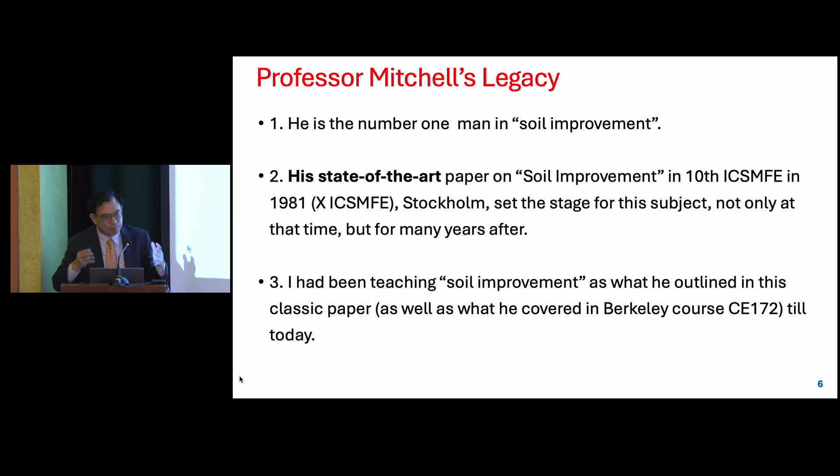He's the number one in ground improvement. I remember his state-of-the-art paper in 1981, Stockholm Conference. To me, it's still state-of-the-art today. Of course, in between there's been a lot of development, but still a lot of basic principles, a lot of key concerns he rightfully pointed out.

Now, by the way, I have that state-of-the-art paper, and to my horror I checked out the table of contents of that conference, 1981. These are all the state-of-the-art papers. Everybody is writing about 20, 30, or maybe 12 pages. Jim's paper is 56 pages. I don't know how many PhD students he asked to help review and summarize things, but he wrote 56 pages, and every word is so profound and so important. Anyway, that is his paper, State-of-the-Art Soil Improvement, 1981.

And not only that, he really spent time, like some of the seniors have said, reading through every reference and making comments, finding something good or wrong about it. He has a list of references, 191 of them, in total 6 pages in double column format. Amazing, right? Now, what I learned from Mitchell, his most important legacy and teaching, is combining three aspects: practical problem solving, and fundamentals of soil behavior.

Of course, we heard about his 4th edition of his book. By the way, his book is a must read for my graduate students, but unfortunately it's so expensive that most of them didn't buy it. Previously there was a cheaper version, but now no more. But anyway, it's definitely one of the very important books that graduate students in Singapore must be aware of.

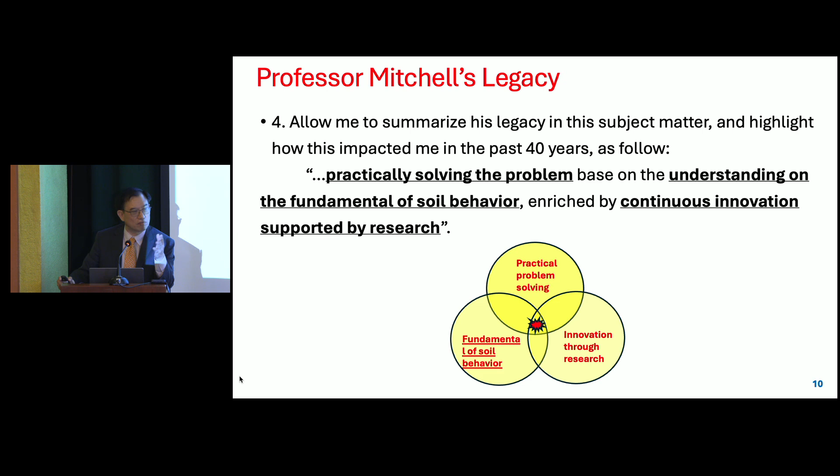And of course, I should also say that Mitchell always stressed innovation. He's quite far-sighted. Someone, the chairman, asked what he thinks Jim will work on now. I think one of the things will be sustainability. I read one of his latest papers - I think a Virginia Tech student, a colleague, may correct me if I'm wrong - one of his latest papers is on carbon footprint for ground improvement. I thought it was very interesting.

All right, anyway, I'm going to share with you the 4 aspects that have affected me, and being his student, I followed his footsteps, which affected my students and the industry in Malaysia and Singapore. Very quickly, I want to highlight 4 aspects which some of you are very familiar with: cement treatment for soft clay, innovative PVD using electro-osmosis - probably Albert has spoken a lot on that - geosynthetic soil improvement using poorly draining soil, which Zornberg may talk more about, and freezing technique in tropical countries.

Let's move very fast, we can skip this one. Well, I know this whole story - telling you jet grouting and deep cement mixing became a norm in Singapore, or of course in Hong Kong as well. When I first returned to Singapore, not many people knew about this technique, but now it's become a norm. Not only that, because we have a lot of underground construction, thick layers of soft clay, and a lot of mega projects like I'm going to show you, such as the airport, that really need ground improvement.

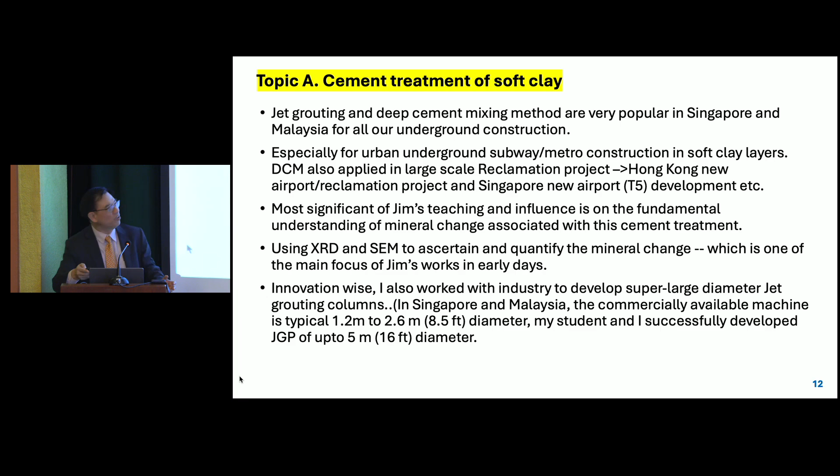And not only that, I should proudly announce that XRD and SEM have become common day knowledge among geotech engineers in Singapore now, thanks to me and other Mitchell students, who try to tell people that if you want to know real soil behavior, especially clay, you must know what Mitchell is holding here - the model of the clay mineral. All right, and these are my standard lecture note materials, telling students about all the different types of clay mineral in a model form and in a schematic diagram form.

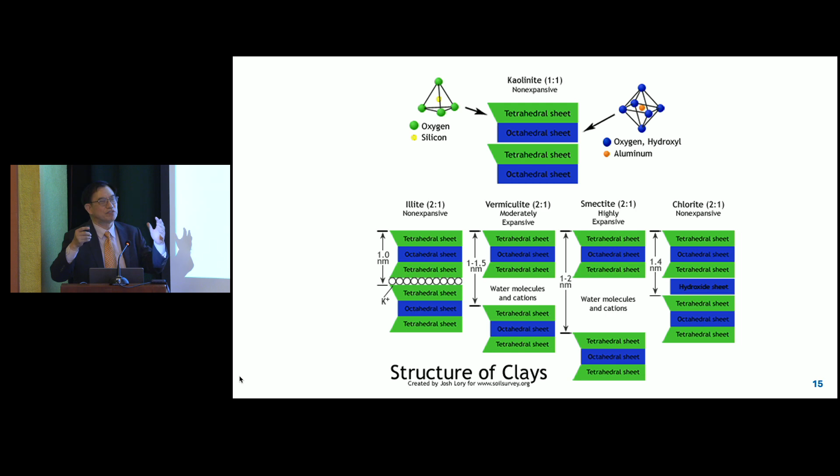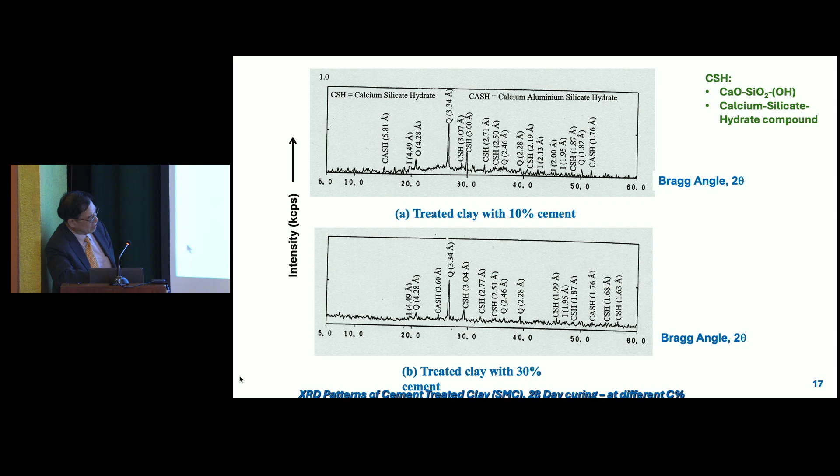A lot of the time we find in Singapore that actually only kaolinite gets transformed. That probably explains why certain parts of Singapore clay are more effectively treated with cement, because there's more percent of kaolinite there. Other parts of Singapore, or parts of Malaysia or Bangkok, have clay that's less kaolinite, more illite. That probably explains it very well.

These are again some standard Berkeley student pictures, nothing new. This is not the best picture, you'll see a better picture from Mitchell, but this is in Singapore.

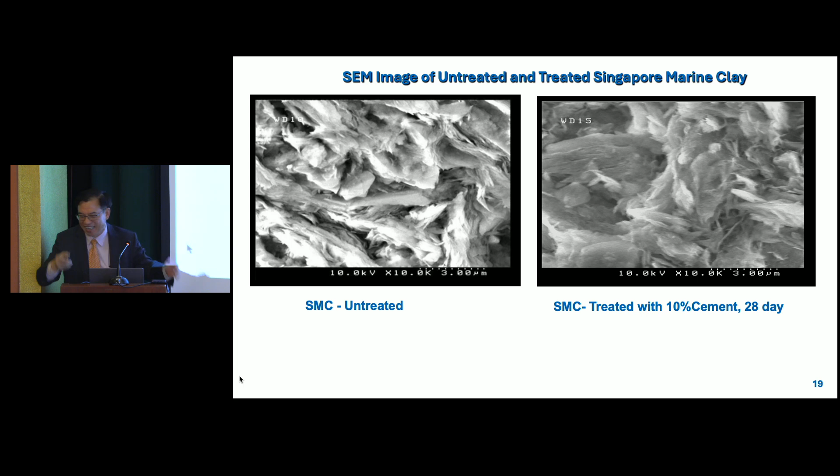These are my pictures. The first thing I did when I went to Singapore was convince my head of department to buy a scanning electron microscope and an X-ray diffraction machine. We use it in a lot of our consulting jobs to explain how clay structure changes by adding all this. We even bought the expensive mercury intrusion porosimetry to determine pore size.

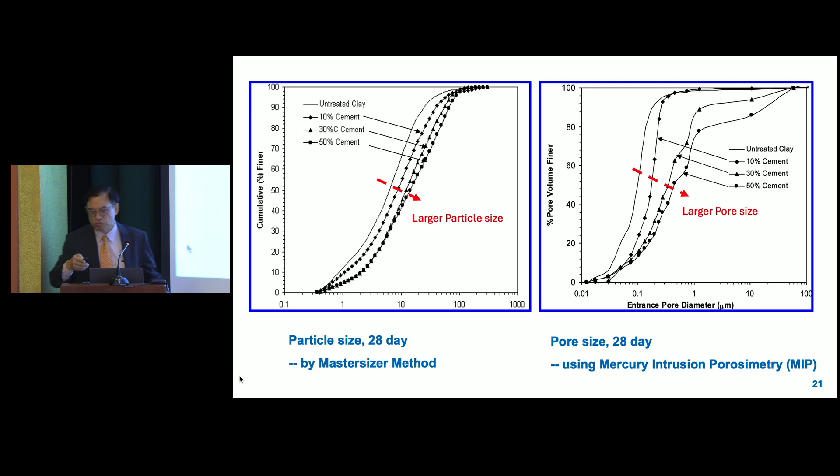We also moved into incineration ash, and you can see with incineration ash, the SEM feature will be quite different when you add SCM with that.

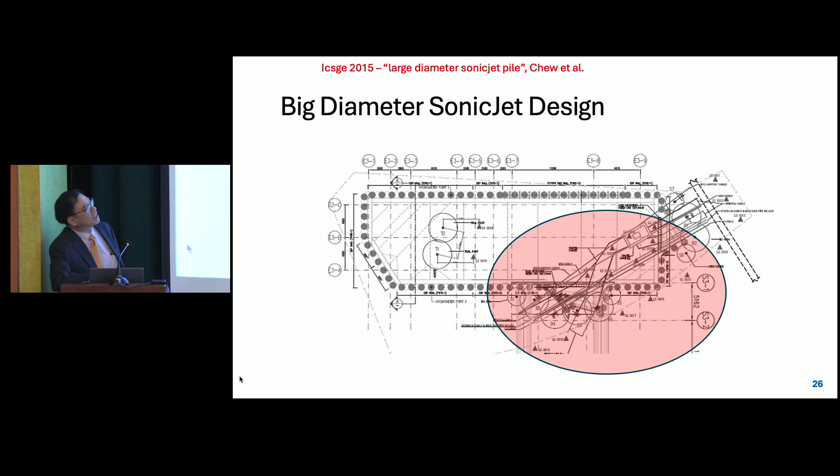Okay, now let's talk about innovation. One of the things I'm proud to announce is that my student and I also got into the mechanism of doing jet grouting, and we developed a bigger diameter jet grout pile.

In the Singapore market, typical piles are up to about 2.6 meters, about 8 feet. But with my involvement and my student's involvement, we managed to change it to 4.3 to 5 meters, about 16 feet.

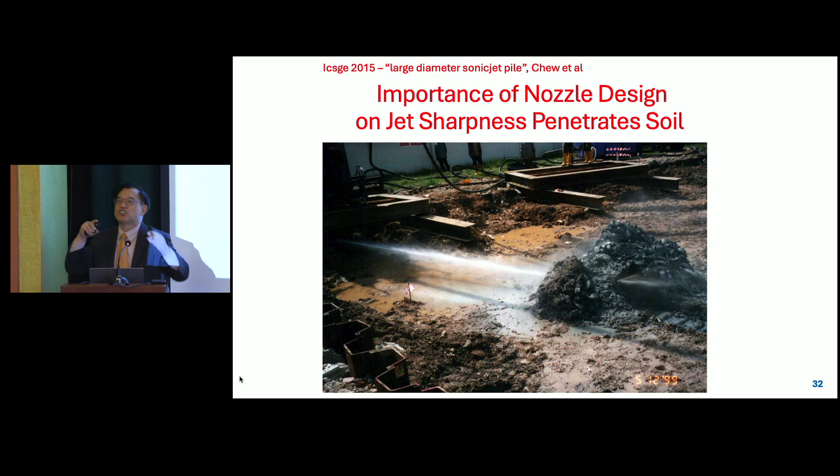So we even invented the testing. You can see this is the conventional jet grouting - the jet energy disperses at a short distance. Whereas the sonic jet that I developed together with my student, the concentrated energy can disperse over a very, very far distance. This is a special paper I can put right in front here.

Okay, let's move on to the second topic - EO. Well, you can skip all this theory; Albert nicely shows all the complicated equations. But in Singapore, following Jim's concept, we look at where it can apply in the field now.

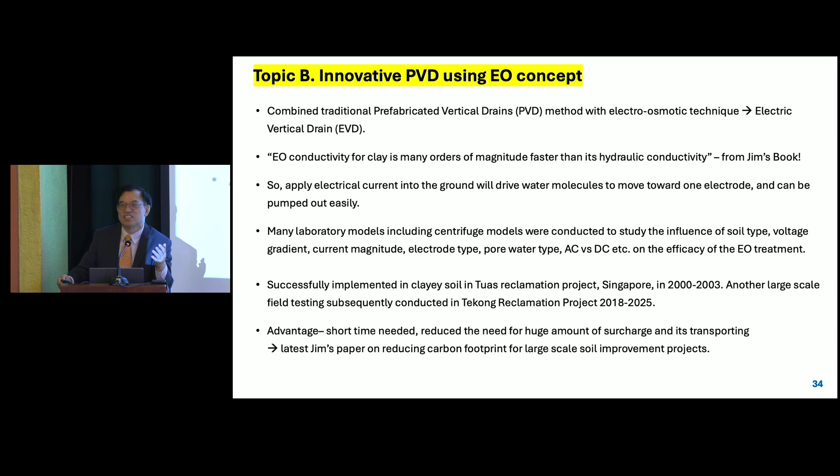So we applied it in the field, and we managed to find one place. But before that, let me show the end result.

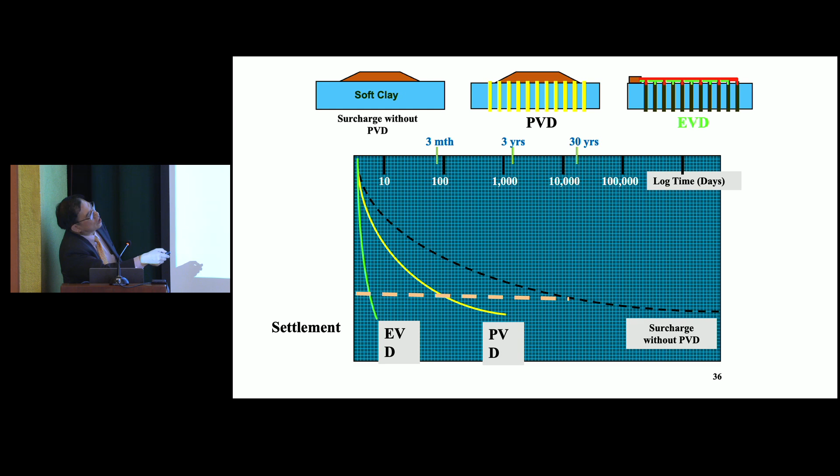So by introducing electric current into the ground, you drive water molecules through electroosmosis, moving them to the cathode, and you can easily pump it out. That effectively achieves consolidation without needing too much surcharge on top, and the time is also fast.

We did a few trials in Singapore on our reclamation project. You can see it just looks like a normal PVD, but if you look carefully, the drain itself has to be connected with wires - these are copper wires of two different colors, one anode, one cathode - and then we run the test.

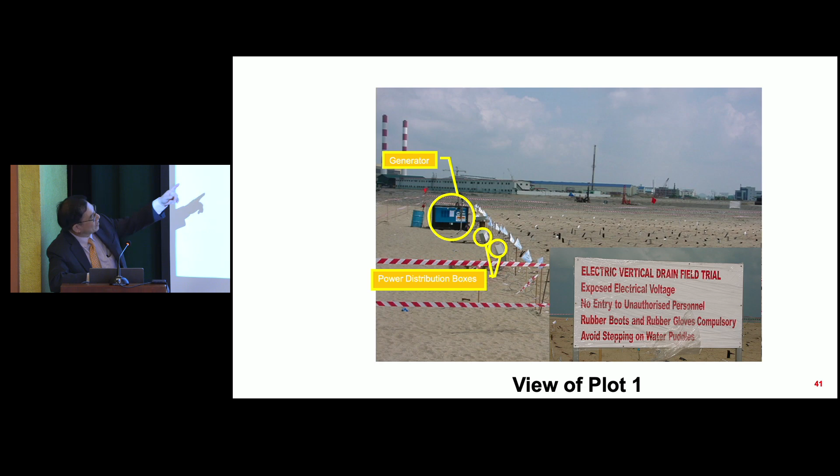To cut the story short, these are my poor PhD students who had to risk their life to measure the potential gradient when the power was supplied. Although we tell them this is at your own risk. Anyway, it was safe. I was there myself too.

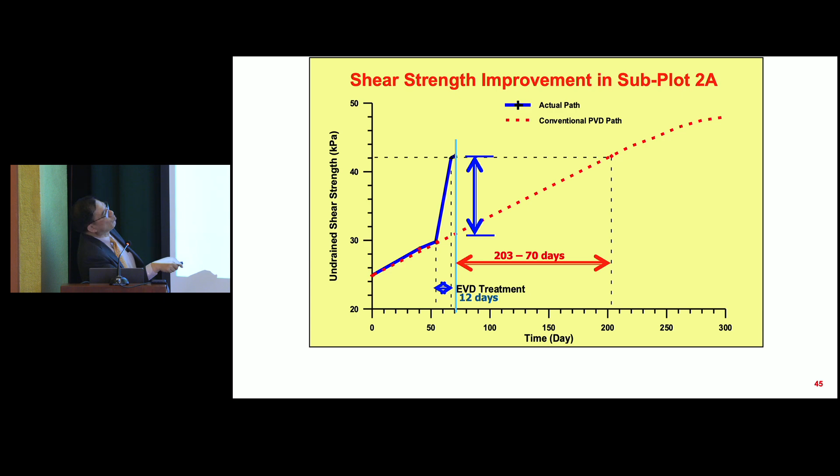Let me summarize with this graph. Instead of settlement, I'm plotting strength gain versus time. This is a conventional PVD calculation, and with the electric vertical drain under EO, you can see it move along the blue line. When you apply it for about 12 to 14 days, you can achieve strength equivalent to about 200 days of normal consolidation time. So with that, you really speed up the consolidation.

Of course, that translates into money savings and so on. But of course, you pay for the higher material cost for the EVD, and you pay for the cost of applying the current. But anyway, that is one step forward.

My next quick topic, which was actually my PhD topic, is on reinforced soil wall. I'm honored to have joined the esteemed team of Adib, Makram Jaber, Gary Schmertmann, and of course Jorge Zornberg. I forget to mention Collin, James Collin, though he was there before I arrived at Berkeley. These were the team of people that started the work on soil reinforcement, and we helped compile the FHWA guide.

At that time, the FHWA guide only allowed sandy soil, which is freely draining, to be used. When we returned to Singapore, I realized that for all the projects we do, we do not have free draining sand, we do not have clean sand. Instead, we have a lot of silty sand, clay silt, sandy silt. We have residual soil, which is a mixture of sand, silt, and clay to a certain extent. So they are not good draining, but can we use them?

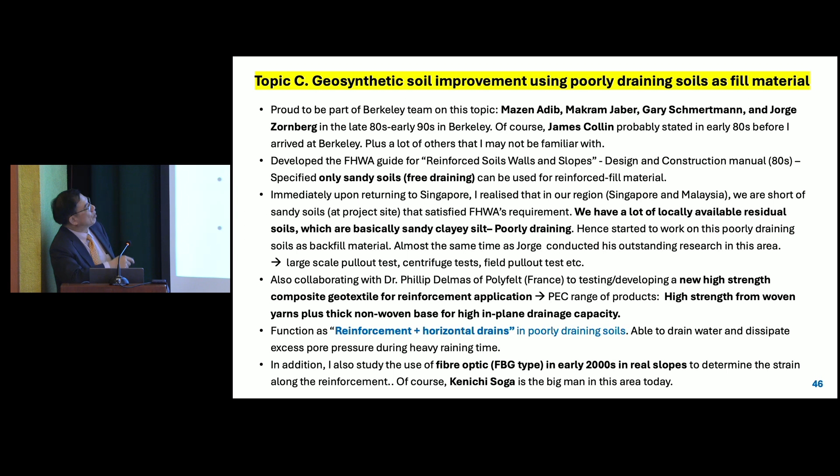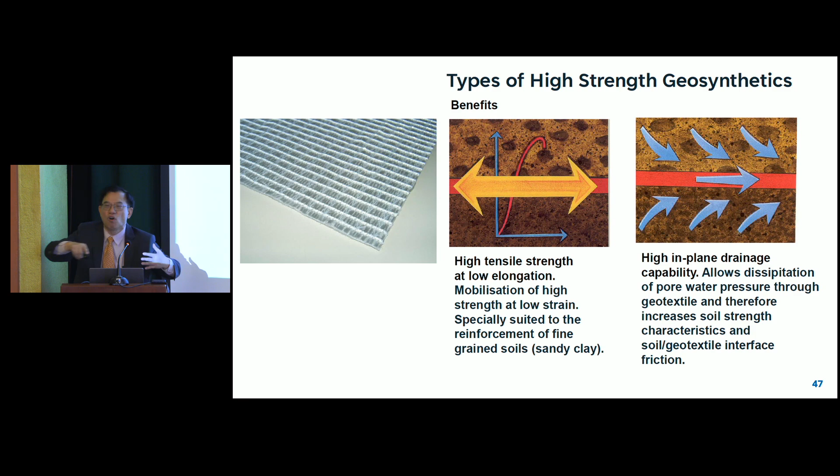One of the important things I did was collaborate with Dr. Phillip Delmas from Polyfelt France, a company subsequently bought over by others, to develop a new type of geotextile product that takes into account not only reinforcement but also in-plane drainage. So in short, you have a high-strength woven yarn that takes care of the reinforcement aspect, but you also have a thick non-woven base which provides in-plane water drainage. With that, water can come in during heavy rain and flow along this non-woven geotextile, serving as a very thin horizontal drain, and it worked well for us.

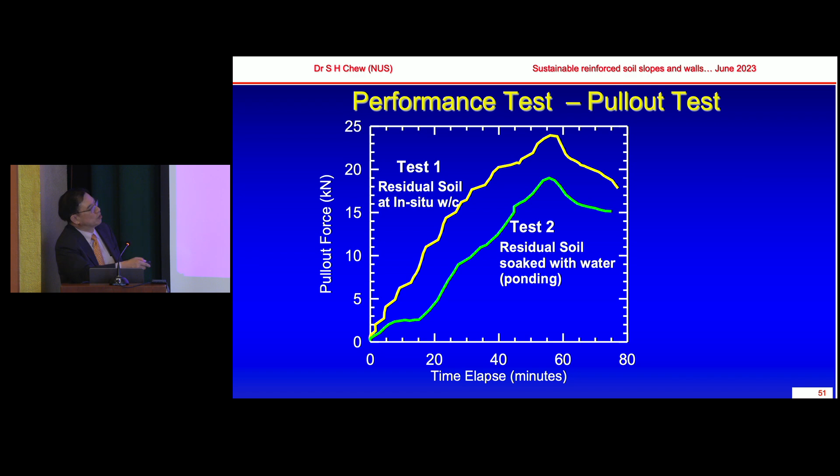Due to the shortage of time, let me just show you a few things. This is the kind of soil that we have - definitely not sand, because we use a sheep foot compactor, which is what Jim taught us in class. This is only for clay soil, and that's how we built all the walls with different facing.

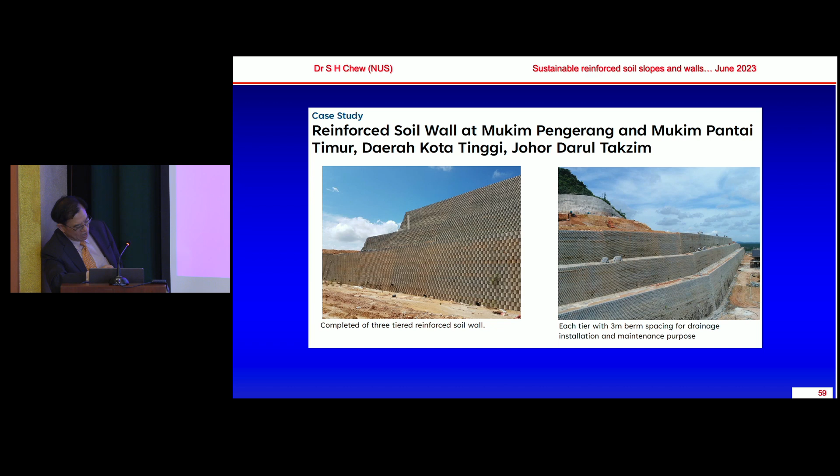I'll just show you how high we built these walls with residual soil, and the movement we monitored upon completion of the project. Total height went up to about 40 meters, with movement still less than 20mm if we stagger it properly, so it's good. Sometimes we like it more green, so the facing we also want it to end up green, like this.

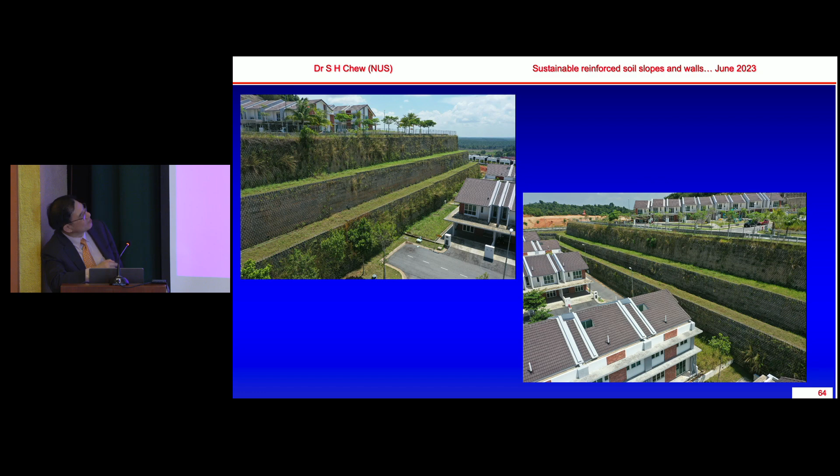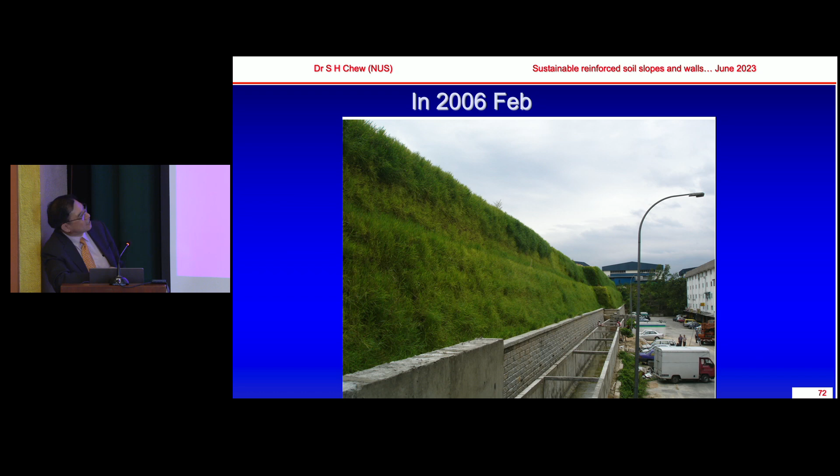Of course, we can wrap with some natural jute fiber as a facing component. You can see how well that works, and with time, this facing component turns into green. So this is the complete wall in September 2005, and about 4 or 5 months later, it's as good as this, and stays like this forever. Green, nice, sustainable.

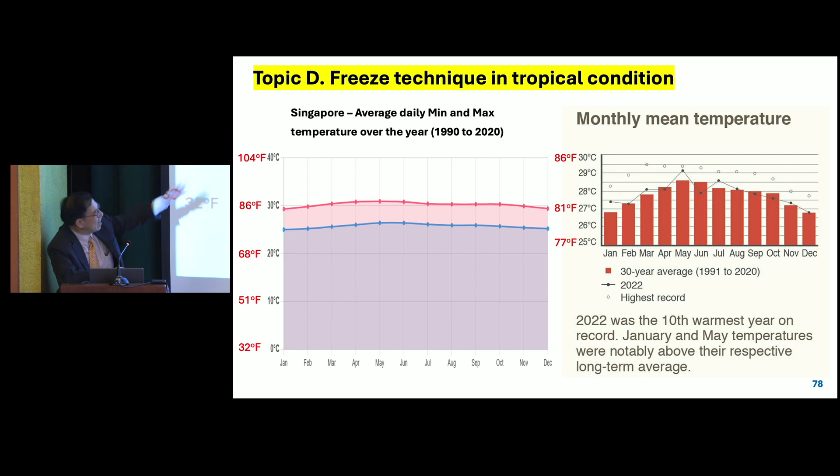Last but not least, I just have 2 slides. Singapore is a hot place. Our average room temperature, all day, all year round, is about 26 to 30 Celsius, 80 to 86 Fahrenheit. This is all day, every day, throughout the year, year after year. You do see a bit of an upward trend, but it's still in the 80s. So in short, Singapore is hot, very hot.

So the question is, will the freezing method that Mitchell taught in class be able to apply in Singapore? When I taught that, all my engineers laughed and said no, never use it. So after 3 years of my teaching, one day a big government contractor came to me. They were constructing an MRT station at Woodland, which had a thin sand layer with water gushing in.

So they couldn't proceed with the work and asked me what the solution was. I remembered what Mitchell said: freezing. So I said, why don't you freeze it? They said, you must be crazy. They stormed out of my door. But 3 months later, they found no other solution, so indeed they did that. They used freezing to freeze the loose sand, and it worked beautifully. That was a private job, and I was the consultant.

That was early 2000. Subsequently, there was a big project, not by me, by somebody else. My students' colleagues realized, hey, we need to strengthen this. This is downtown, the last pictures I'll show. This is the existing MRT, your Mass Rapid Transit, like BART or a subway. There was an existing BART line here, and they wanted to build 2 new ones across it. This is downtown, so there are a lot of buildings here with a lot of piles, so we really couldn't do any better.

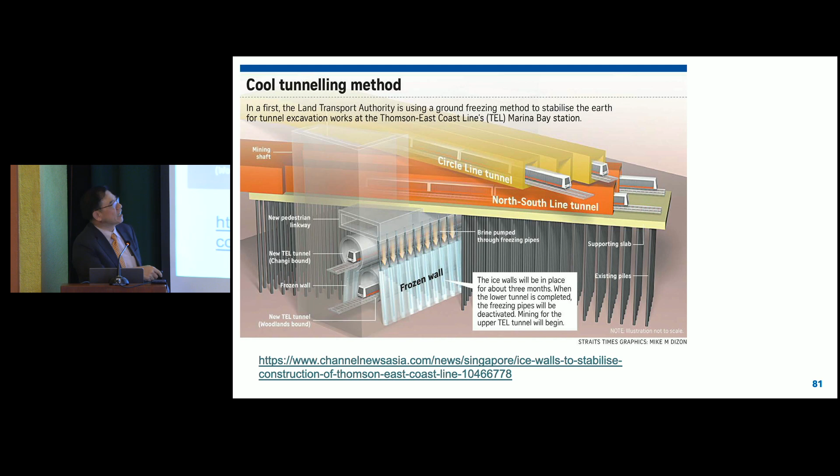So finally they said, to avoid soil movement in these soft clays, why don't we do freezing? So you can see the frozen wall left and right, built for them to construct this lower tunnel, and then subsequently to build the upper tunnel.

That is Mitchell's legacy. So finally, I just want to say, to me, he is an excellent teacher, an excellent researcher, a caring mentor to me. And don't forget, he was an outstanding engineer. May God bless his family continuously, today and forever. God bless everybody. Thank you.

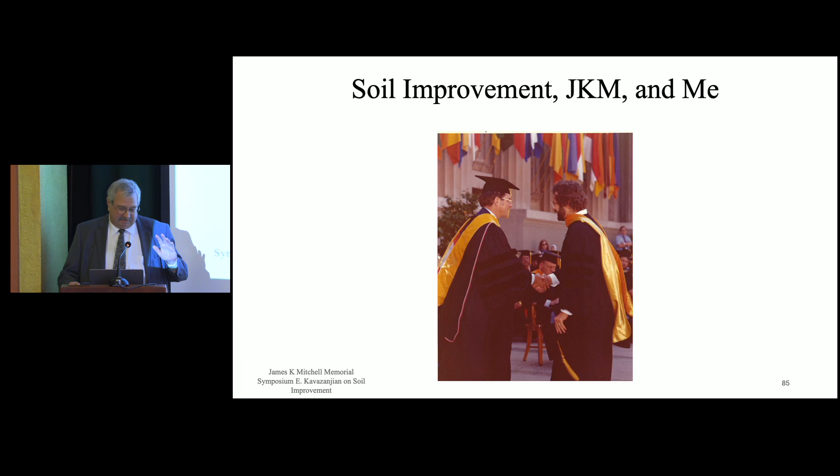When we think about Jim, typically the first thing you think about is soil behavior. But if you look at his contributions and bibliography, you'll see probably the biggest chunk of papers is on soil improvement. There were probably very few soil improvement techniques that Jim didn't work on.

I think it was Rick who mentioned that after Jim graduated from MIT, he spent 3 years in the Army. Maybe he spent some of that time blowing up bridges, I don't know. But I do know he spent a lot of that time at the Waterways Experiment Station.

Perhaps the first paper he published after his PhD thesis was on work he did on soil improvement at Waterways. By the time this paper was published, he was at Berkeley, but the work was done at WES. Jim was the lead author of this paper on a review and evaluation of soil cement pavements—his first foray into ground improvement.

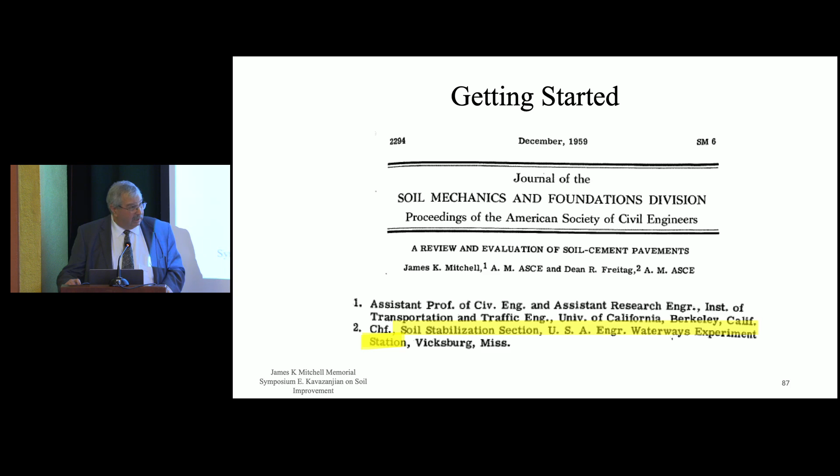One of Jim's hallmarks was his penchant for collaboration. Jim was a wonderful collaborator, very gracious with his time if you were collaborating with him, and generous with credit for the work that was done, giving his coworkers credit.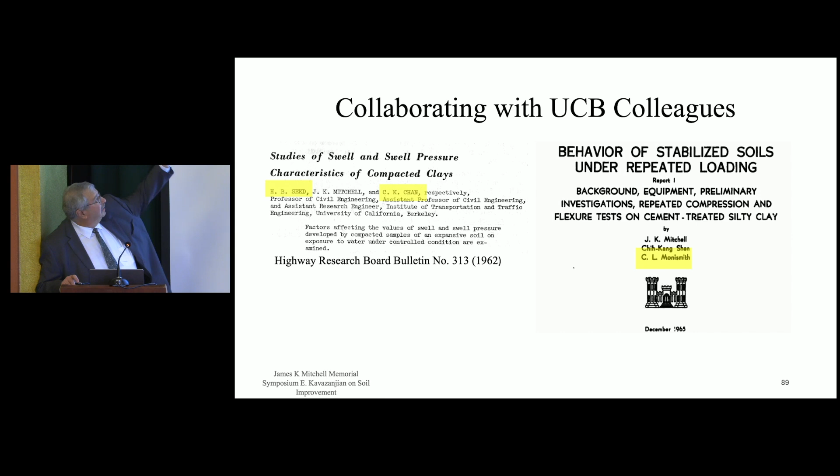Here's some of the early work he did with collaborators at Berkeley who he worked with throughout his career: Harry Seed, Clarence Chan, Carl Monismith, who I know Jim had a very long relationship with. This is early in his UCB career when he started this history of collaboration with his colleagues.

We've heard comments earlier about fundamental principles and Jim's focus on fundamental principles of soil behavior. In fact, ground improvement is an extension of soil behavior. If you want to design an effective and efficient ground improvement program, you need to know how soil behaves. So a lot of the relationships we make on compacted clays, which we take for granted now, the effect of compaction energy, the effect of compaction moisture content on the structure of clay, those were fundamental breakthroughs that Jim Mitchell developed in the early 1960s.

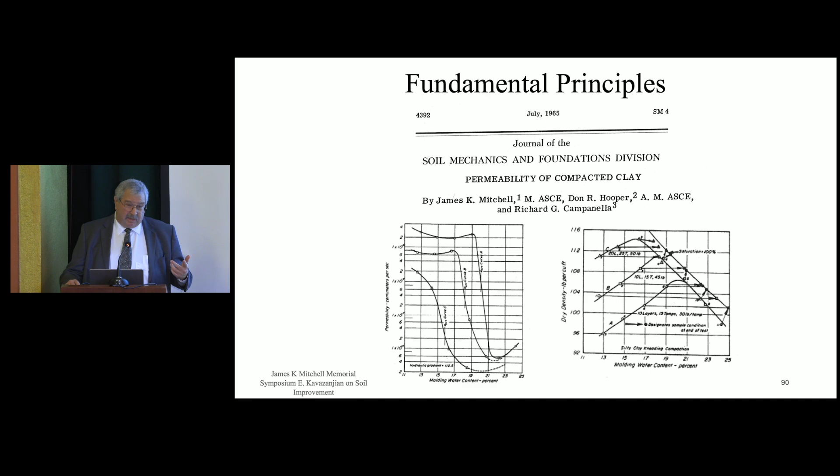This paper by Mitchell, Hooper, and Campanella is one I still have the students in my soil improvement class read. It's a fantastic paper about the relationship between compaction energy, moisture content, and the behavior of compacted clays.

We've heard about Jim's work on coupled flow phenomena and its contributions to soil improvement. There's a wonderful diagram in Soil Behavior, I hope it's still in the 4th edition, I know it was in the 1st, 2nd, and 3rd edition. It's a 4x4 matrix of the 4 conduction phenomena: fluid, electrical, chemical, and heat transfer. On the diagonal are the direct flow relationships: Darcy's law, Ohm's law, Fourier's law. But the off-diagonal terms are the coupling terms of how electrical flow is coupled with fluid flow, and how chemical flow is coupled with fluid flow and with electrical flow.

In 1976, Jim organized probably the first conference on soil improvement at UC Berkeley. It was a 5-day symposium. The intent was to raise money. Berkeley, or the U.S. National Society, had just been awarded the 1985 International Conference on Soil Mechanics, and Harry Seed had this program to raise money for it. This was the first part of it.

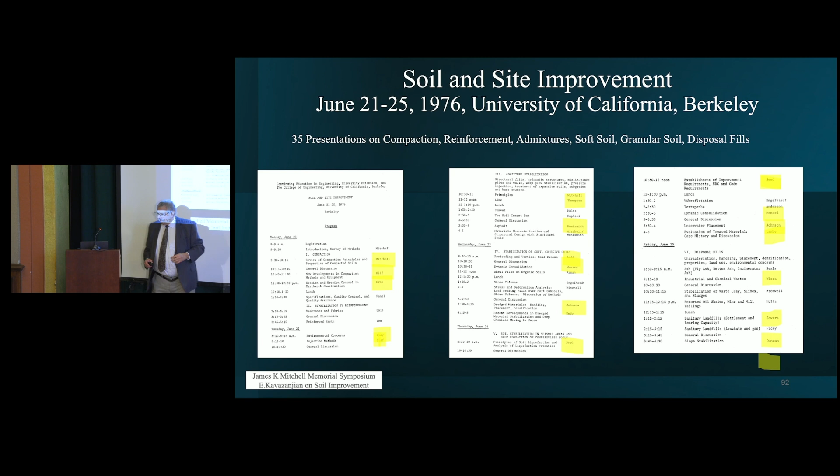This was an all-star team of the who's who in geotechnical engineering in the U.S., plus a few international participants thrown in: Jim Mitchell, Don Gray, Marshall Thompson, Carl Monismith, Stan Johnson at the Corps of Engineers, Harry Seed, Chuck Ladd, Les Bromwell, and Anwar Wissa from MIT. Literally who's who of geotechnical engineers, 35 papers on soil improvement.

I still have these 2 thick blue binders with the 35 papers, and I still have occasion on particular types of soil improvement to go back to that binder and look at the contributions from these outstanding geotechnical engineers to soil improvement.

We also heard in several presentations about the first state-of-the-art report on soil improvement that Jim authored for the 1981 Soil Mechanics Conference. That was the first of several. Jim was involved in several state-of-the-art, state-of-the-practice summaries of soil improvement, but this was the first comprehensive summary in a single place of soil improvement techniques.

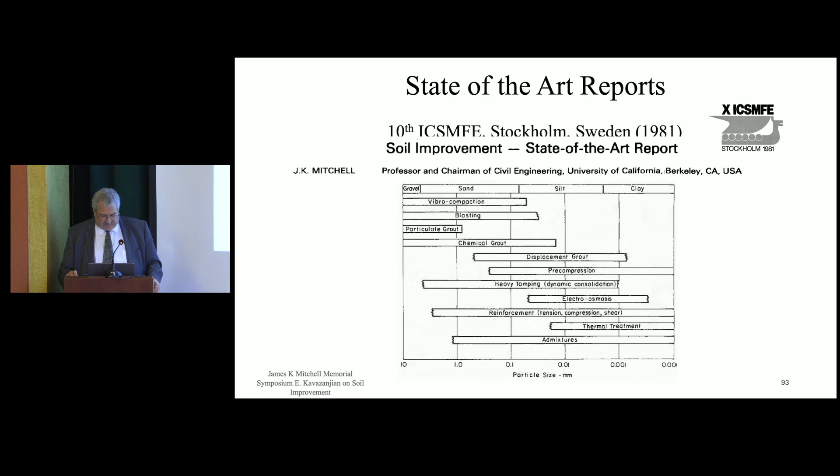Physical model testing: Jim did not hesitate to use new technology. We heard Robert Leong talk earlier about his PhD thesis on centrifuge testing. It was a joint project. I was teaching at Stanford at the time, and Jim and I had this joint project. When we were planning the proposal, Harry Seed sat in on a meeting, and Harry was a skeptic. He didn't think this new technique that the Brits had developed, centrifuge testing, really had any role in geotechnical engineering. So Jim carefully explained to Harry what we were relying on the centrifuge testing for.

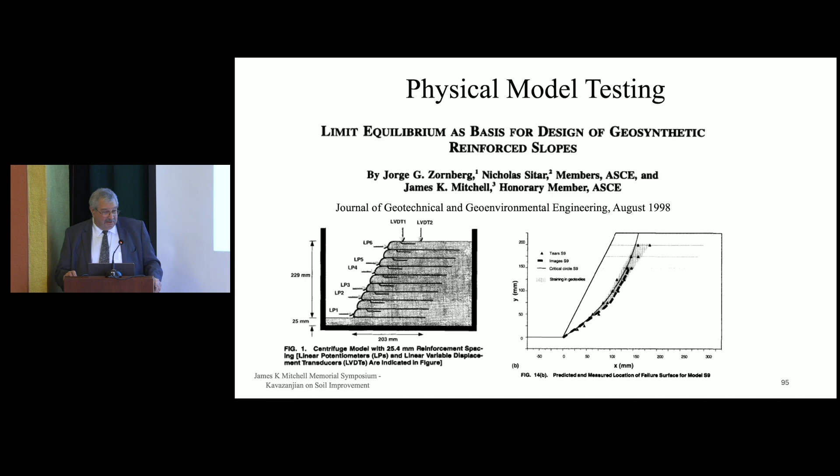Harry got up and said, 'Thank you, Jim, I now understand the value of centrifuge testing,' and he left the room. This is some later work he did, and I don't know exactly what Jorge is going to talk about, but this was Jorge's dissertation. He continued to innovate throughout his career. We might hear a little later from Russell Green about an energy method for predicting liquefaction, or the potential for liquefaction in soils. He continued to show leadership throughout his career.

There was a committee on geological and geotechnical engineering in the new millennium, opportunities for research and technical innovation, a National Academy committee that Jim participated on, and it identified 4 areas in geotechnical engineering for the 21st century, including biotechnologies, which is something near and dear to my heart.

I appreciated the comment Scott made that if Jim was alive today, he'd be working on biotechnology. In fact, for my engineering research center, Jim was on the science advisory board for the first 5 years of the center as we launched our efforts into developing these new methods.

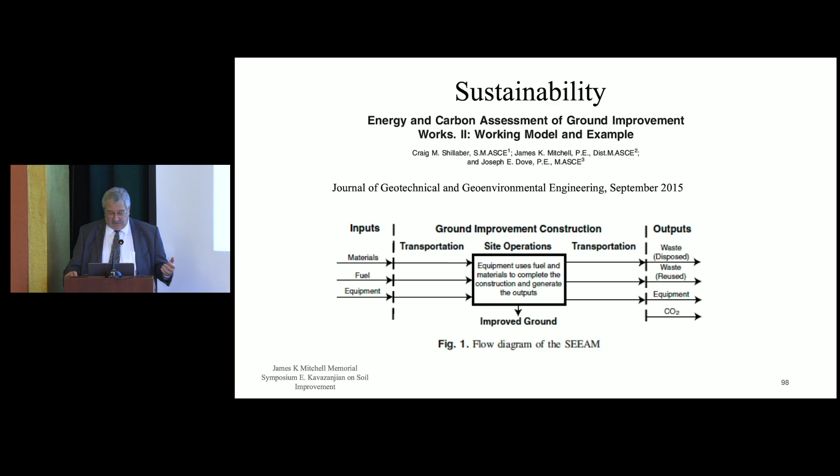And then finally, sustainability. Jim constantly changed with the times. He was constantly looking at what the key issues were in that time and making contributions to those issues. One of the last papers that I could find that Jim was a co-author of was on energy and carbon assessments, embodied carbon assessments of ground improvement. It was a 2-part paper with the theory and then a working model and examples.

So those are some examples of the many ways in which Jim has contributed to soil improvement throughout his career. We've heard, to me, Jim is an exemplar for all of us on how to conduct ourselves professionally and personally. He was a Boy Scout leader. He played in a jazz band. He was a renowned geotechnical engineer, an innovator, an educator.

Most importantly, to me, he was my dear friend, and I really miss him. Thank you.

So our third speaker in soil improvement is Professor Jorge Zornberg.

Good afternoon. What a privilege to be here honoring Jim Mitchell with such a distinguished audience. All of us influenced by Jim. I'm going to follow on the topic of soil improvement, but I'm specifically going to talk about geosynthetics.

And I would consider a broad interpretation of soil improvement because geosynthetics is really mixing soil with a non-soil material. In a sense, one way or another, we are modifying the way that the soil behaves. And so that's why one of the words in here is geosynthetics. But I'm going to talk about addressing the reactive nature of our geotechnical discipline using geosynthetics.

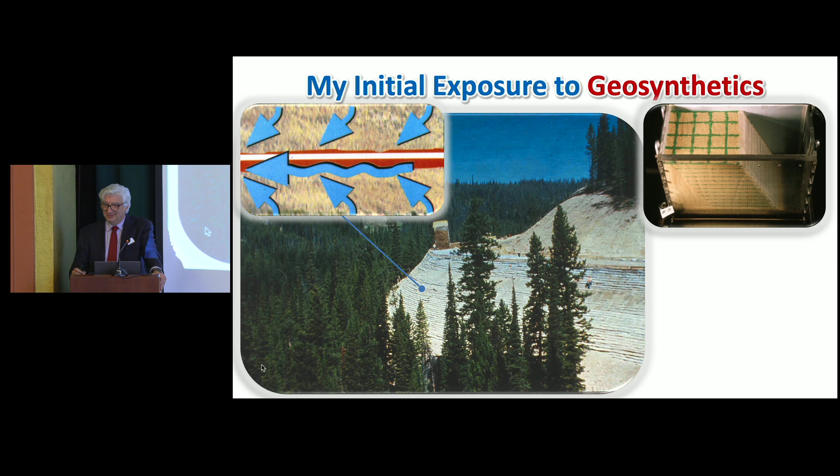But it was a great experience, and essentially we learned that our design methods, for the most part, work well. We understood that limit equilibrium really works, and we could not bring this big structure to failure. This monitored structure was to understand the behavior of reinforced soil structures under working stress conditions.

But then we also learned how geosynthetic reinforced soil structures could work at failure. And yes, our tools work. What governs is peak shear strength, and not residual shear strength that is used in Europe works. Those are the type of items that I worked on during my PhD, my first exposure to geosynthetics, and that's an area I continue working on.

I would say that my areas that I work the most are two: one is geosynthetics in different ways, and the other is unsaturated flow. The reason I came about unsaturated flow was after my PhD, I worked at Geosyntec with Ed.

They put me in a big proposal for the OII Superfund site for the evapotranspirative cover systems. And I said, I'm a geosynthetics guy, why are you going to put me in a proposal for a non-geosynthetic cover system? The idea was a big message saying that a geosynthetic expert was saying that the right cover at this place was a non-geosynthetic solution.

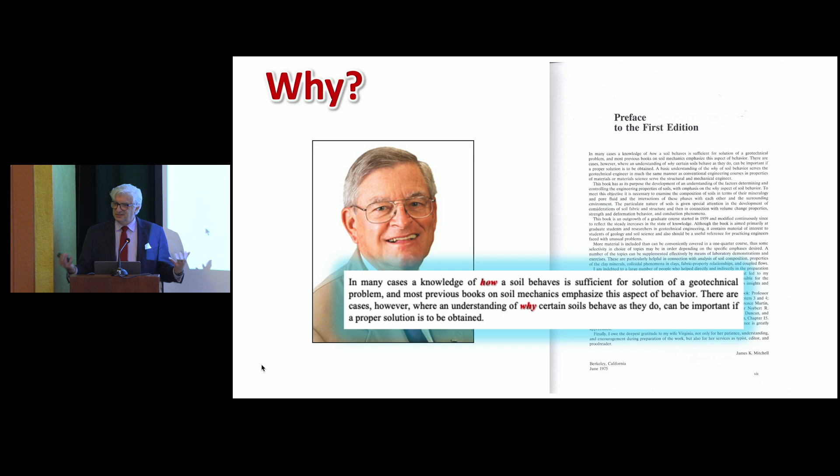I already knew that Jim was working on the why, but he was working on the why in a field that really needed that why. So the uncertainty and the uniqueness of geotechnical engineering is great, but there is a lot of need of why. So one thing that may not have been said is I believe that Jim was a great strategist, because he found a field where there was a significant need of explaining why things behave as they do, and that's what he focused on.

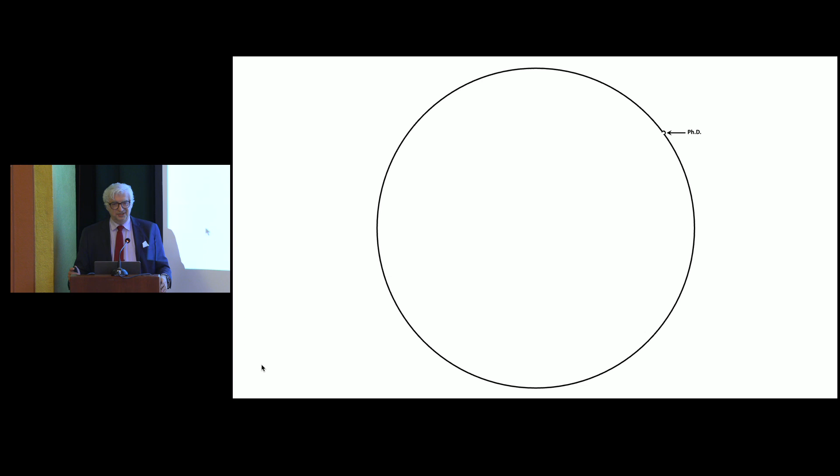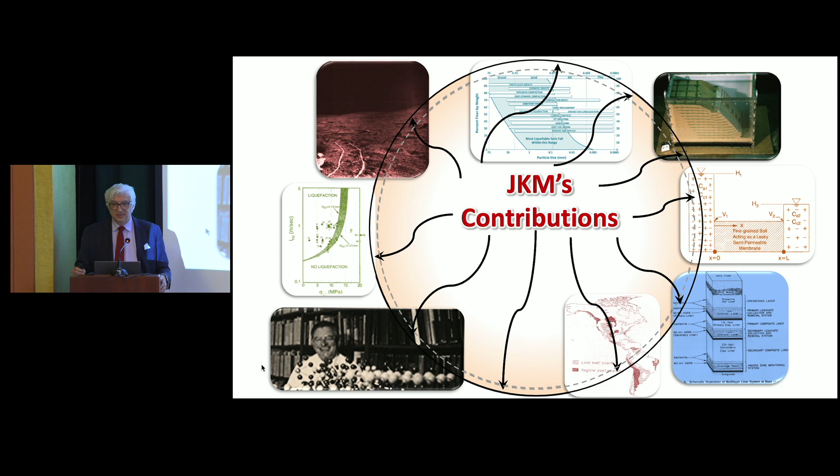So with my PhD, and many of your PhDs - essentially if this is the world of knowledge in geotechnical engineering, with our PhD we can push and create a dent in the state of knowledge in geotechnical engineering. That's my PhD. However, Jim was able to significantly increase the boundaries of our knowledge in geotechnical engineering, because, I could kind of disagree that he was working in too many different areas - I think that he worked on one, and that one was why the soil behaves as it does.

Okay, so now within the topic of why things work as they do, I'm going to take you to the area of geosynthetics. And in a sense, this is also an area where there is a lot of need of understanding of why geosynthetics work as they do.

So what I'm going to show you is not necessarily research activities in which Jim was involved, but research activities - and I'm not even going to talk about the research, I'm going to talk about how a lot of this why was tied to real practical problems, real practical questions. There was a lot of fundamental work - all his work was fundamental, but fundamental that was needed for real impact in our profession.

So I'm going to walk you through some case studies that motivate understanding why geosynthetics work the way that they do. The first project, in an area where geosynthetics is growing significantly, is in the mining sector. I'm going to take you to a mining project near Cusco in Peru.

This is the Las Bambas copper mine, one of the largest copper mines in the world. And when something is needed in mining, it's needed now. They needed rapid relocation of water from a reservoir for continued mining operations. The solution was to build a high-capacity canal using geocells with concrete infill.

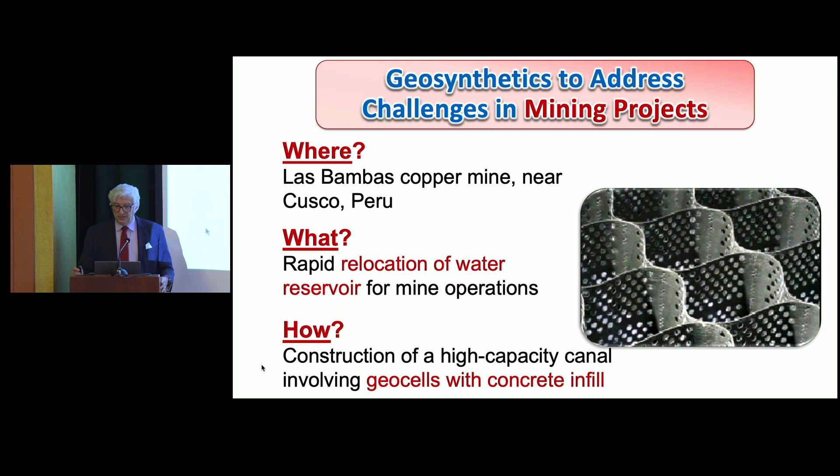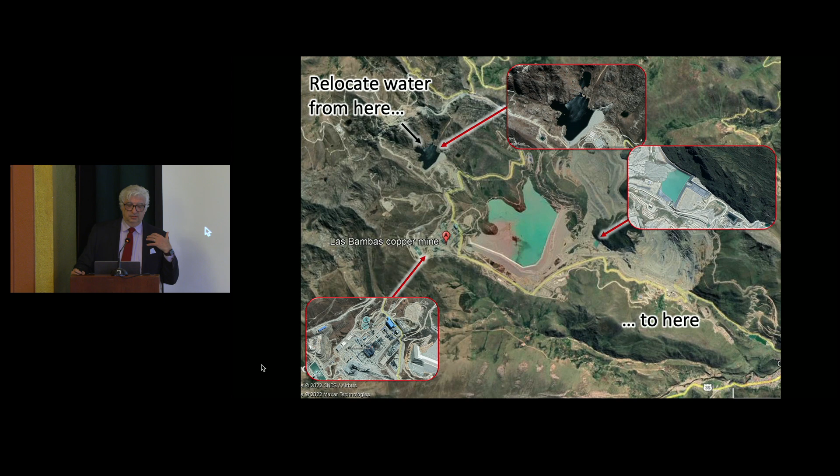Here is the mine, and you can appreciate the mining operation facilities. You can see the tailings dam, and an open pit over on the right. What I want to call your attention to is the reservoir of fresh water and the smaller reservoir where the water was really needed. The idea was a need for rapid conveyance of water from this location to that second location.

The solution was particularly challenging, but there is good understanding that it works. Geocells provide an alternative to reinforced concrete, but with shrinkage controlled in a very, very controlled manner. I'll come back to quantifying the leakage through this. In this case, it was such a deep excavation cut that it needed essentially vertical walls, and geocells are not ready for that. So the solution was to join a geogrid anchored on the surface with a geocell.

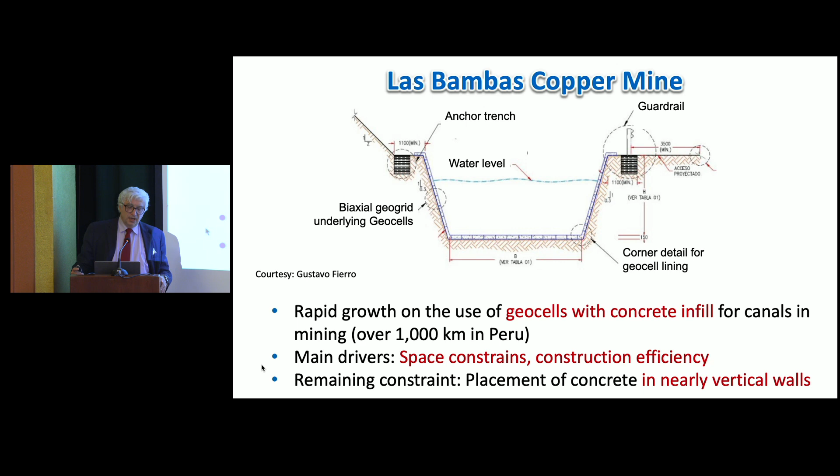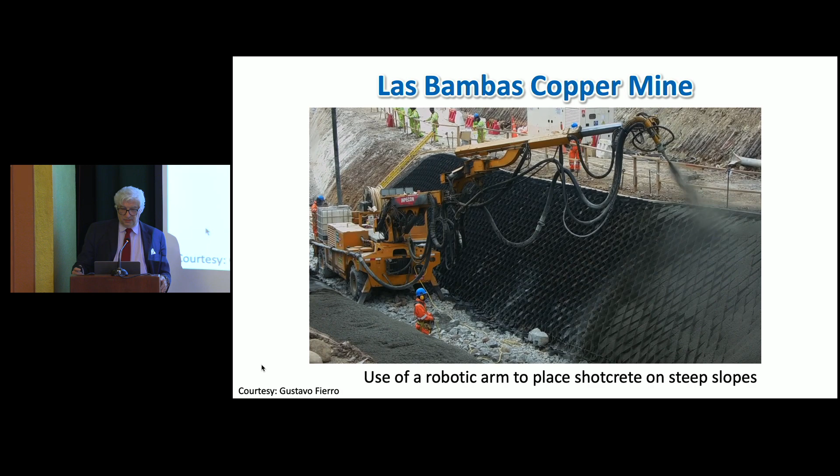The second important problem: now we have a geocell system in the canal, but how do you place concrete in it? Another unusual aspect was that the concrete placement was done using shotcrete instead of the commonly applied fresh concrete. So this example was significant for the use of shotcrete, and the use of a geogrid instead of steel stakes to hold the geocell in place.

But the main message is, why does it work? There was a need to quantify this. We know it works, but why? It has to do with the fact that if you control leakage through small cracks, the leakage is proportional not to the thickness, not to the square of the thickness, but to the cube of the thickness of the crack. So we'd rather have a significant number of small cracks in our concrete structure than the significant cracks that may occur if we let the concrete stand by itself or with joints.

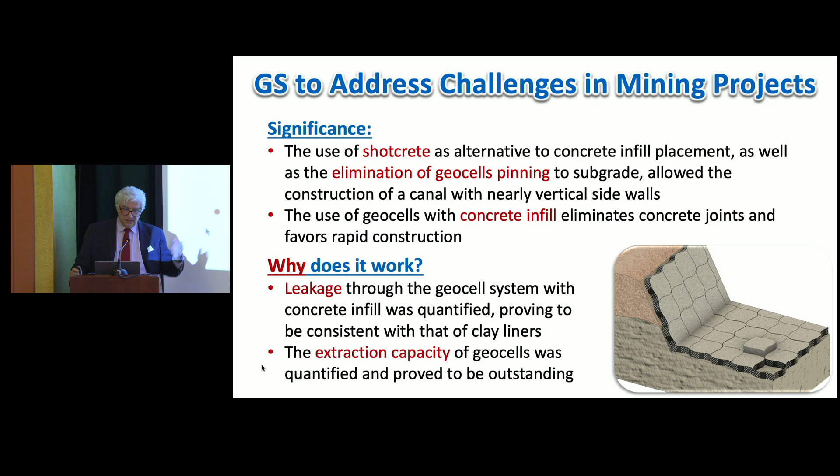In addition, it was necessary to quantify the extraction capacity of the geocells from the concrete infill under significant water flows. Okay, that was one example. Let me tell you another.

In this case, soft foundation soils. Typically, when we think of geosynthetics, we think of retaining structures, not soft foundation soils. Well, that's not true. So I'm going to take you now to Turkey, to the Kirsehir embankment.

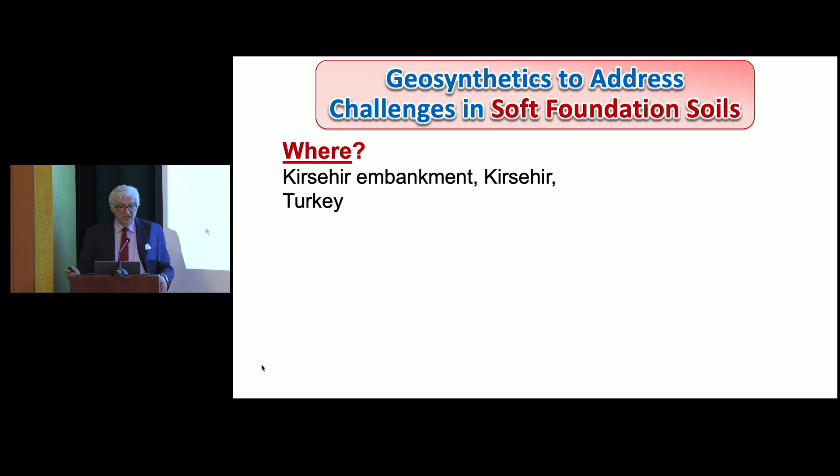Essentially, the solution in this case was to adopt a technique—and by the way, at this location the problem was also seismic, with many important issues. An embankment had to be constructed underwater. There were 14 meters of soft clays, and it was in a highly seismic area. The solution was to use what is called geotextile encased columns.

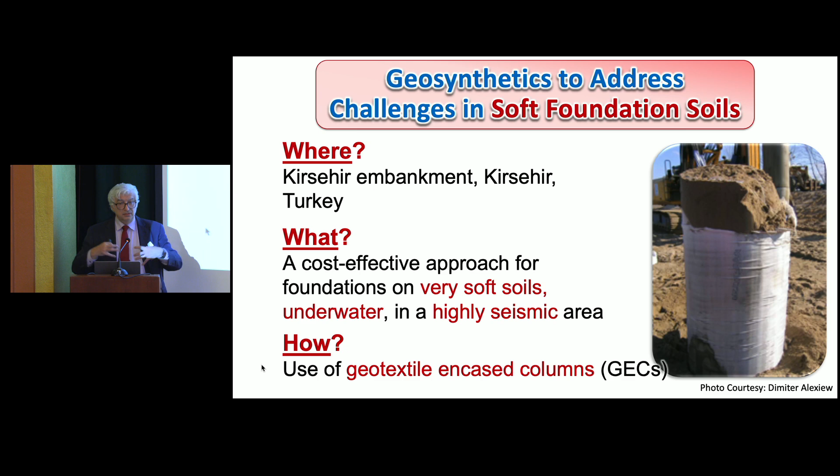Geotextile encased columns have been around for a while, and they are particularly good when stone columns are not suitable. Here we're talking about an undrained shear strength on the order of 15 kPa, about 300 PSF. With such low shear strength, gravel doesn't sustain itself. So not only do you need the encasement to maintain the integrity of the system, but you also take the opportunity to confine the gravel laterally and add strength to the system. That was the solution.

This is the setting: essentially a new reservoir that divided a city in two. So they needed a bridge, but the bridge had to go over 14 meters of very soft soil. It was already underwater, so this was, as I understand, the first placement of this kind of operation underwater.

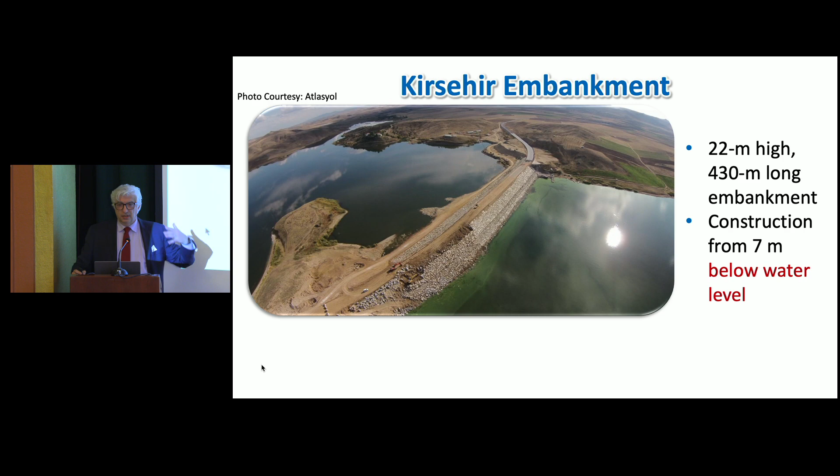We're talking about a 22 meter high, 430 meters long embankment that was constructed below the water. It was designed with a design acceleration of 40% acceleration of gravity.

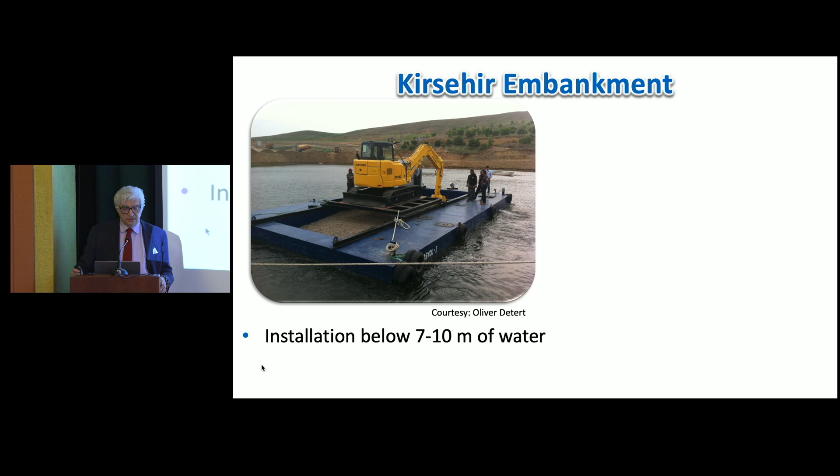Stone columns: a study by colleagues demonstrated that stone columns could not maintain their bearing capacity after an earthquake, but a geotextile encased column could. Here is a view of the construction of the underwater system, installation of the geotextile encased columns.

On the order of 12,000, and that is correct. So it's 12,000 geotextile encased columns that were the foundation of this embankment.

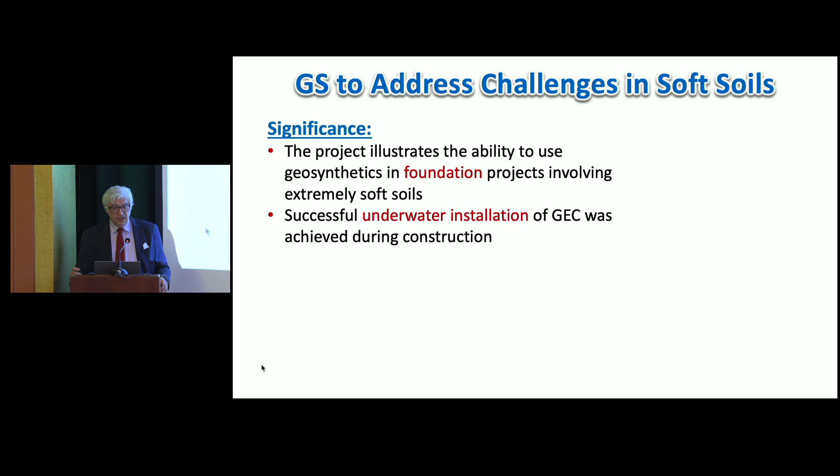So what is the significance here? The significance is that the project illustrates the ability of using geosynthetics in a project that typically we do not think of them for, which is foundations, and foundations on very soft soils. It was successfully undertaken underwater.

What is it that we need to know? We know that it works, but why does it work? Well, we still needed to understand the relevance of the hoop stresses, how much of that load is transferred by shear, and the interaction with nearby columns. We're talking about columns that are 1.7 meters center to center apart.

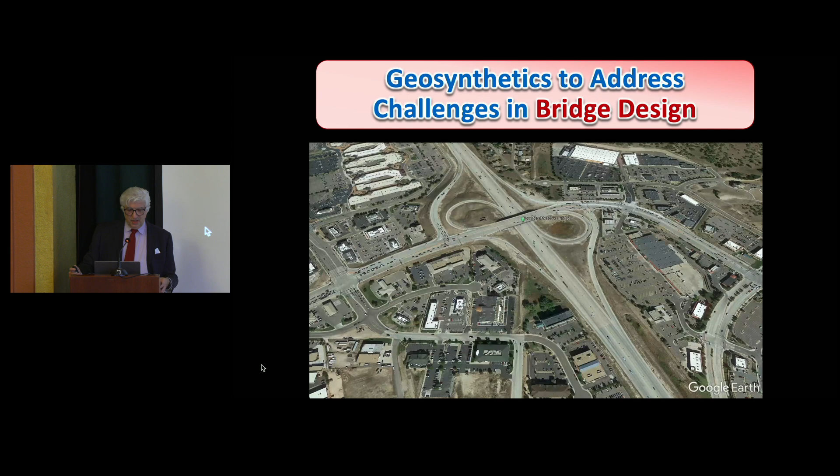All right, so let me take you to another example in which we need to understand why. This is for bridge design. I'm going to take you to Colorado, near and south of Denver. The project here is the Founders Meadow Bridge Abutment.

The important aspect that the Colorado DOT wanted to achieve was to get rid of the bump at the end of the bridge. That was a big motivation. They also wanted an expeditious construction.

The solution ended up being the very first, at least the first on a major highway, load-carrying geosynthetic reinforced bridge abutment, rather than using deep foundations, which is the typical way in which the load of the girders is transferred to the foundation soil.

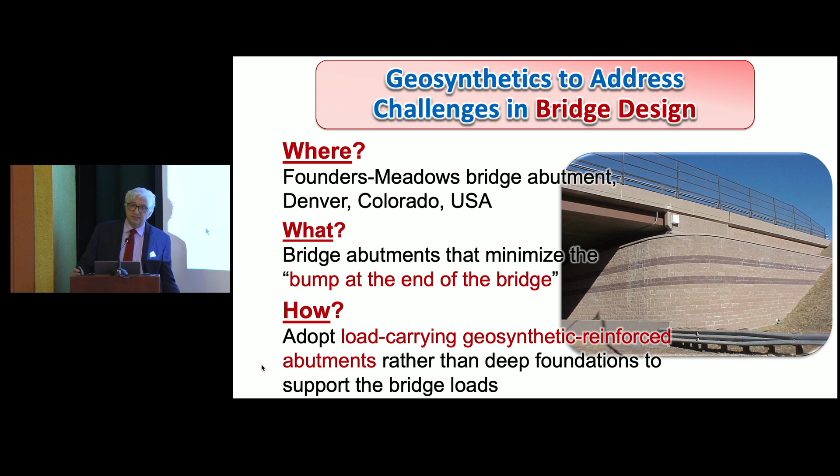So let me clarify, if you're not familiar with this technology—I think it's extremely promising—the differences between a retaining wall, a geosynthetic reinforced wall, and here a bridge abutment. This is a GMSE wall, geosynthetic reinforced bridge abutment, which is what you're going to see if you drive by in California or Texas. You'll see many geosynthetic reinforced abutments, but they carry the load of the approaching road.

These are retaining walls. We design them as retaining walls. But the load—and that's why we have the bump at the end of the bridge—the approaching road settles, and the bridge doesn't settle, and that's when you have a bump getting into the bridge, and you have another bump.

I was surprised in learning how much money goes into the maintenance and accidents that occur because of this bump at the end of the bridge. Instead, what this construction essentially was: it was not a reinforced wall, it was not a reinforced foundation. It was both. So this is what we call a load-carrying geosynthetic reinforced bridge abutment.

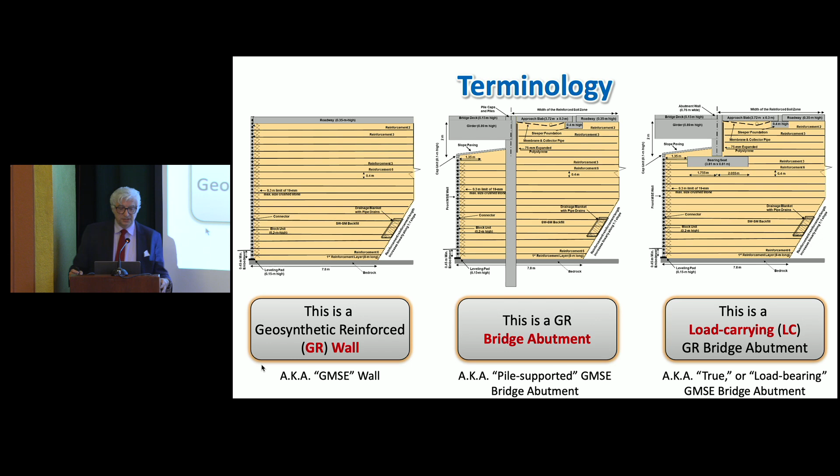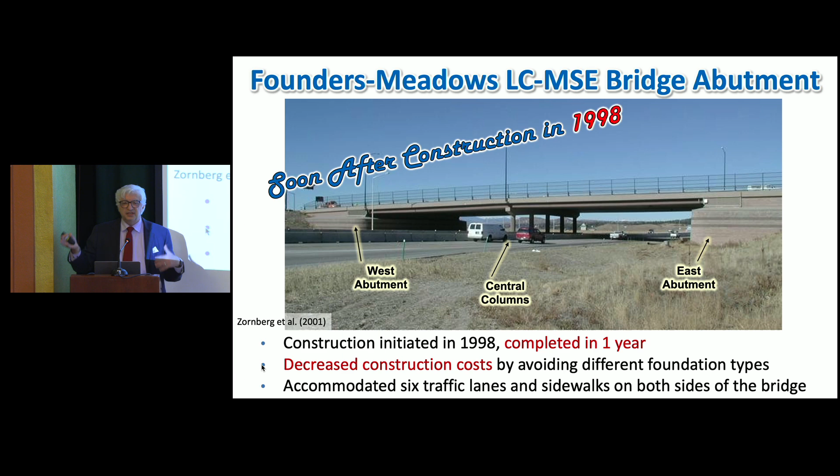It was successfully constructed, but this was 1998, so now we're talking about over 25 years. We'll revisit this 1998 construction. The big motivation was getting rid of the bump at the end of the bridge. It was also because it didn't require deep foundations—it was very expeditious to construct, and easier to sequence the construction of the different lanes.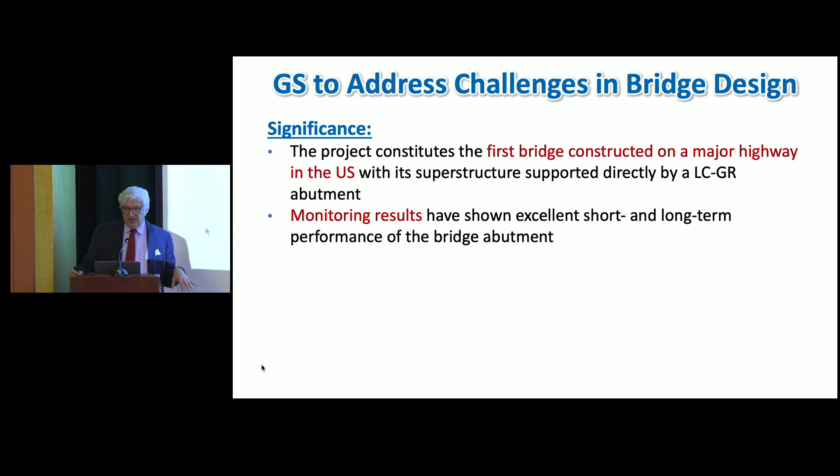Well, this is the first bridge constructed on a major highway. It has been done in the US before, but for very small structures. And the monitoring results—one of the monitoring results—demonstrate very, very good performance.

So why does it work? What was needed? We know that it works. Well, there were many questions. There were questions: okay, this is a concentrated load, and this is a polymeric material. Will we have time-dependent problems? I can tell you now, no, we don't.

What about the load? There is a significant emphasis nowadays in design trying to accommodate or account for vertical spacing, and particularly close vertical spacing.

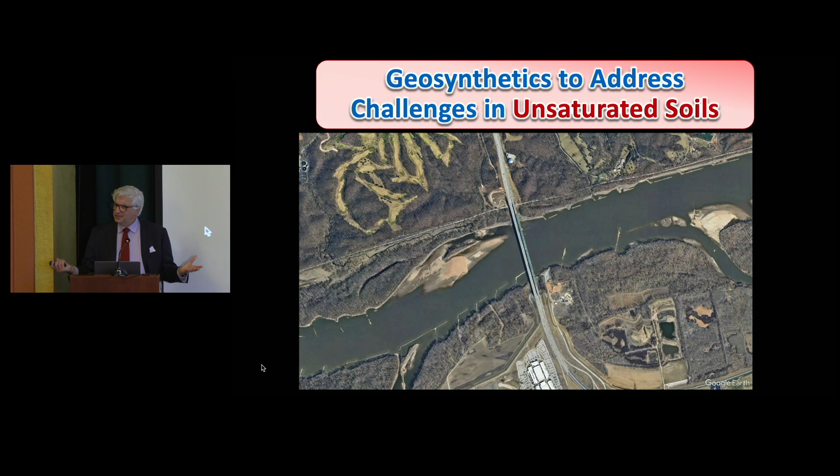I'm going to take you now to another topic: geosynthetics to address the challenges of unsaturated soils. Let's look at the Daniel Boone Bridge in Missouri. There was a need to build this structure, but there was a problem: the water table was very high, so capillarity would do its job, and a common base material has fines. If the fines get moist, we compromise significantly the structural capacity of the bridge.

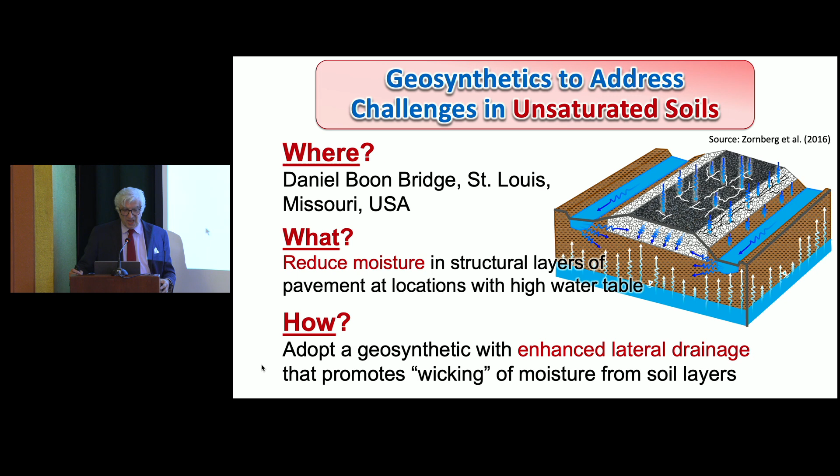So what was the solution? To adopt geosynthetics that can fight the unsaturated flow, that can fight capillarity. Believe it or not, if you're familiar with unsaturated soil, drains do not drain under unsaturated conditions. Drains drain once the contact between the soil and the drain becomes saturated. If not, drains do not drain. The only way to make a drain drain under unsaturated conditions is adding suction. That's what these new products, some would call them intelligent geosynthetics, are doing.

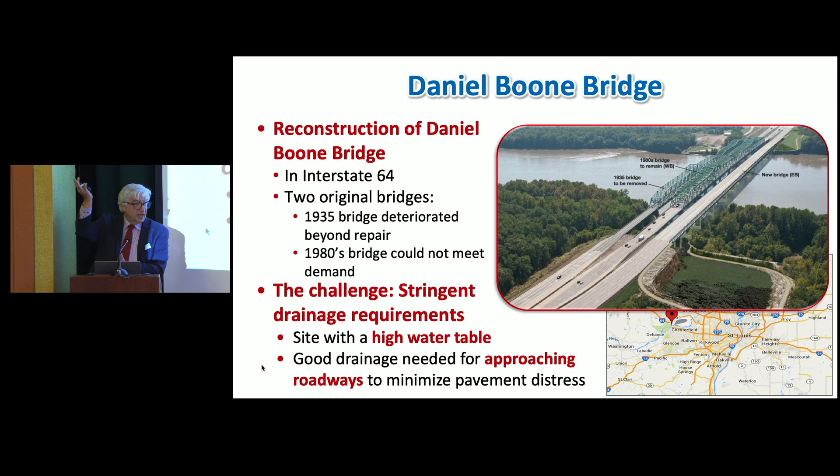Here is a view of the location, Interstate 64. There was an existing bridge, then a second bridge. Now they needed a third bridge to attend the capacity. There was a solution, a very expensive one, to have such a clean drainage material that would work as a capillary barrier and not allow moisture to advance into the regular base. Instead, the solution was to add a regular base material, but with this wicking geosynthetic.

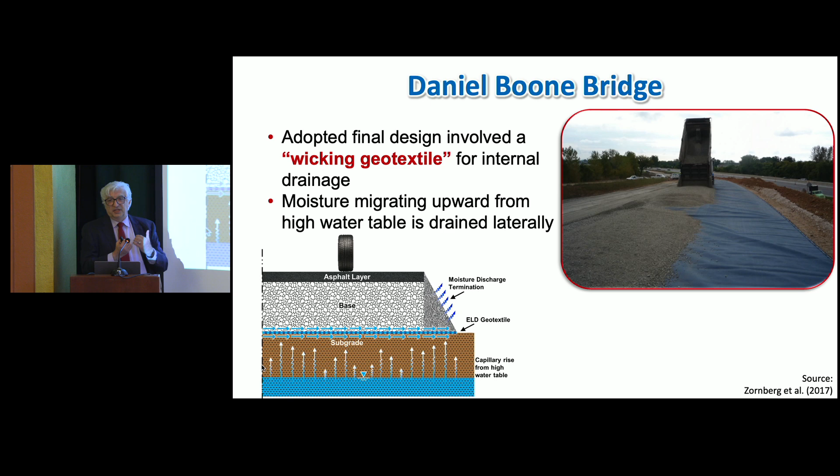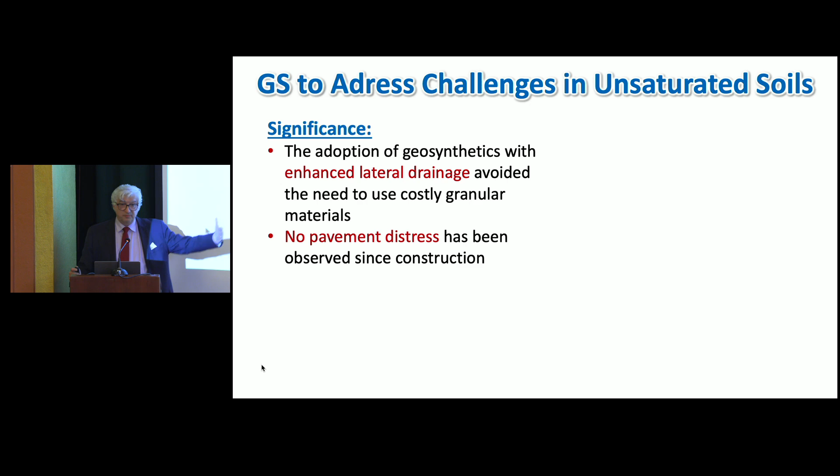Here you see a view of the placement of the geosynthetic with wicking capabilities, which would have the moisture migrating from the high water table into the interface with the base, then migrating under suction laterally. Even during construction, this was already observed to be working. The significance: the adoption of geosynthetics with enhanced lateral drainage avoided the use of very expensive material that needed to be hauled from far away, and no pavement distresses have been identified since its construction.

Now, the key is why. Why do they work? What is the trick? There are many aspects to be sorted out, but this is the idea: we have the wicking, very, very small, literally capillary tubes. Where are those tubes? These are really grooves within the fibers themselves.

When we think of a geotextile, yes, they have pores, but that's not the water we're talking about. The geotextile has pores, but that's not where the water is conveyed. Typically this textile has yarns, a family of fibers, but within each yarn, that's also not the moisture migration we're talking about. What we're really talking about, and here are the cross-sections of the actual fibers, is the migration of water through these capillary tubes.

In pavement engineering, under capillarity, we're talking about very, very small flows. The flow is somewhere on the order of, and when I report this in liters I know many of you could not relate to it, about 3 bottles of wine per foot per day. That's the small flow we're talking about, and that makes a significant difference.

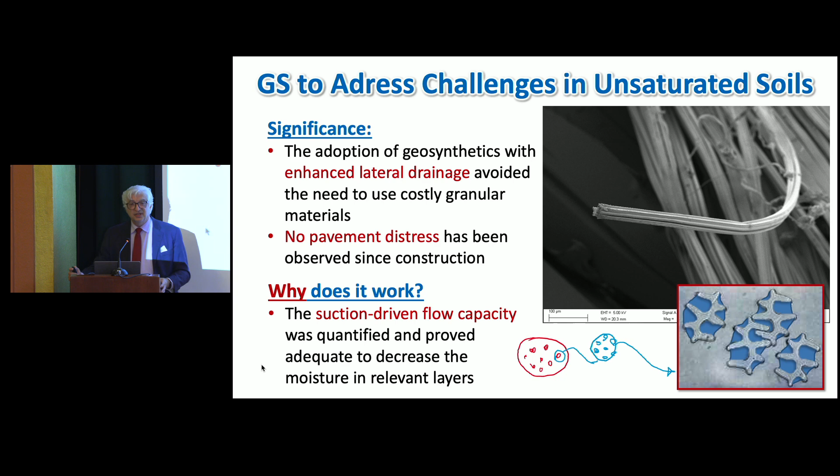I'm going to take you to the last one: problematic soils. More specifically, where I am, the problem is expansive clays. In the north, the problem is volumetric changes due to frost heave susceptible soils. So I'm going to take you to the expansive clay soils.

Milam County in Texas. What was the problem? The detrimental effect caused by expansive clays. This is a real problem that was poorly understood until very recently. Very often we attribute the distress to traffic, but it has nothing to do with traffic. Some would call these environmental loads.

The idea is that during the dry season, the shoulders of the paved road desiccate, moisture infiltrates or desiccates through the shoulders, and they settle in relation to the center line. That's when you see the distress that is the fingerprint of expansive clays: longitudinal cracks. During the wet season, the shoulders will heave first in relation to the center line, and the cracks could even close.

But the cracks are already there, and the migration of water has already started, and the degradation process has already started. So how was this solved? Essentially, there are different ways in which geosynthetics can work, but the one I'm going to show you is a geosynthetic used to stabilize the base of the material.

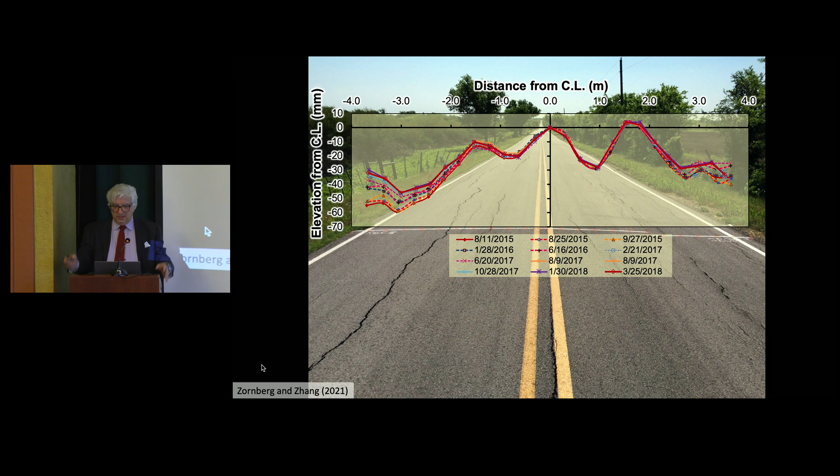This is a real problem, close to my home in East Austin. This is what you see in a low-volume road, and these longitudinal cracks have nothing to do with traffic. Because it's close to home, we monitored the profile during a not particularly extreme drying event. We monitored the relative movements of how much the shoulders move in relation to the center line, and we're talking about 20 millimeters in a regular year - about an inch that goes up and down. When it goes down, that's when you see the cracks.

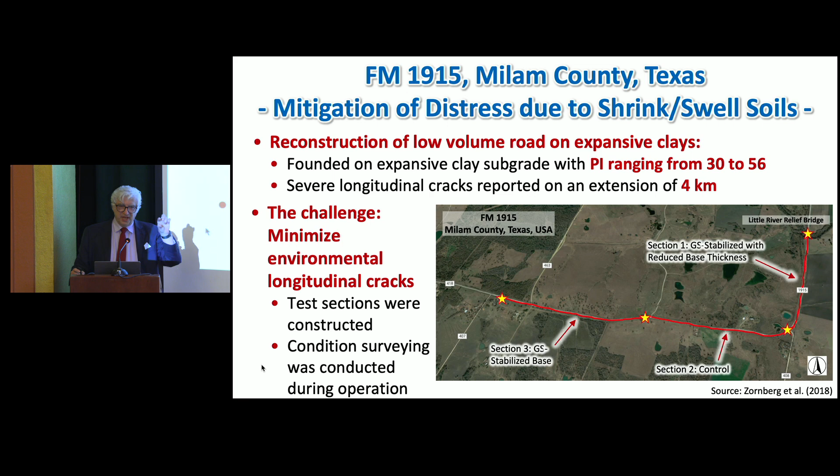Even when you don't see longitudinal cracks, even when you try to capitalize - because this geosynthetic solution has been promoted, rightfully so, as providing additional benefits to traffic loads - and even when reducing the base, one of the potential benefits, we do not see longitudinal cracks. So the lesson: the geosynthetics prevented the development of longitudinal cracks. But why do they work? Well, that's when we come to the significance: field evidence has shown that basal reinforcement stabilization precludes the development of longitudinal cracks.

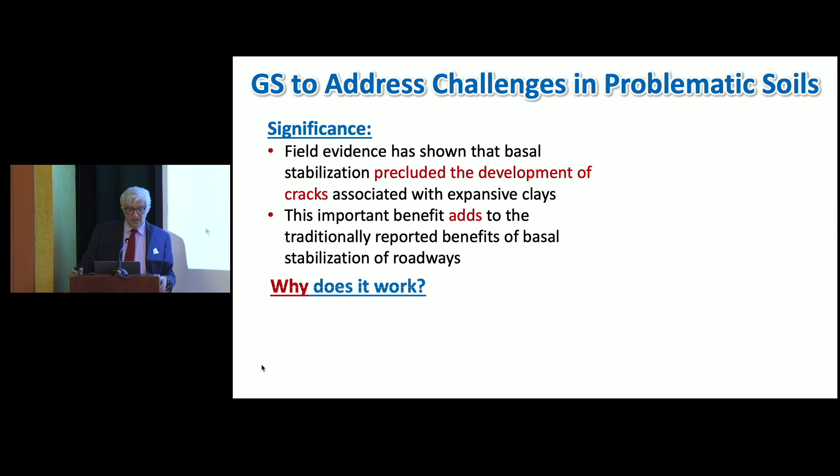And why does it work? Well, it's a long story, but I'll tell you it's the interaction between the geosynthetic - in this case, for example, a geogrid - with the base that essentially maintains the integrity of the base. When you have longitudinal cracks, it's because there was a strain concentration that triggered the crack. So this is not preventing the vertical movements - the vertical movements will occur. What will not be triggered are the longitudinal cracks. That's why it works as it does.

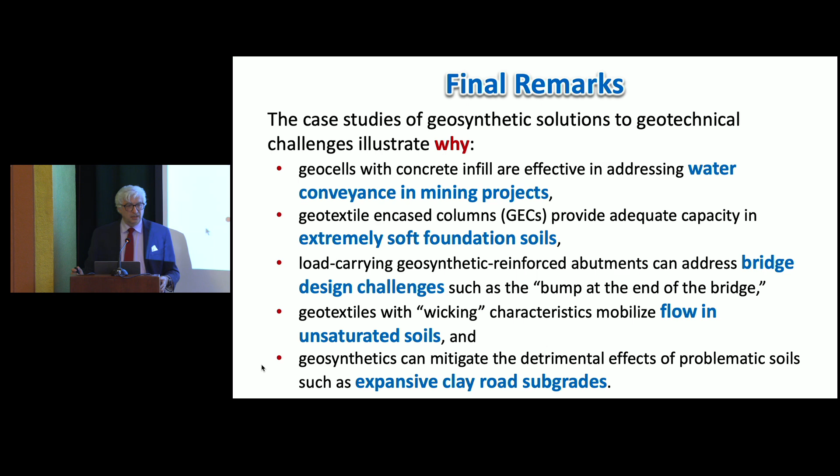Final remarks. In these case studies, my intention was to show solutions that, even though Jim may not have been working on these particular projects, were inspired by trying to not only understand how this solution would work, but why it works as it does. So we have seen why geocells with concrete infill will work in mining projects for water conveyance, and geotextile encased columns will provide foundation bearing capacity to very soft soils, and how the bump at the end of the bridge can be addressed by a special, unique type of design, how we can even have flow under unsaturated conditions when using what we call wicking geosynthetics, and how we can deal with problematic soils such as expansive clays.

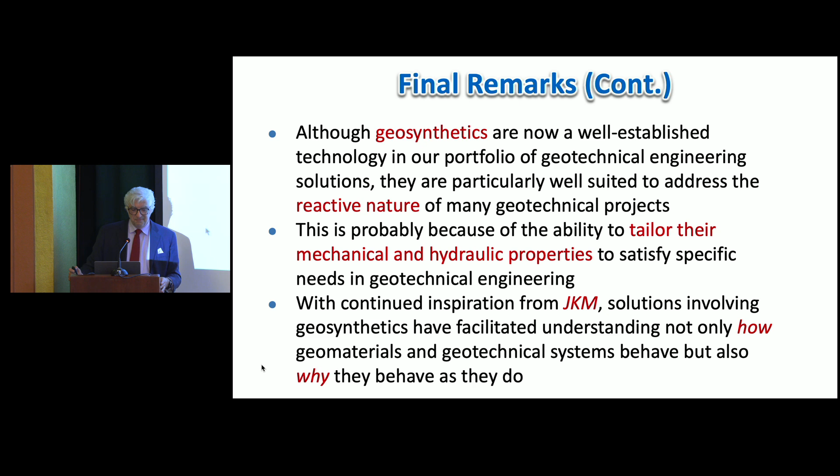Final remarks. Although geosynthetics are now a well-established technology in our portfolio of geotechnical engineering solutions, they are particularly well-suited because we know what properties - if we understand the mechanisms, we know the properties we can tap into. We just need to know what the mechanisms are, and we will be able to deliver the properties. And I would say that with continued inspiration from Professor Mitchell, the solutions involving geosynthetics have facilitated understanding not only of how and if the system would work, but also why they behave as they do.